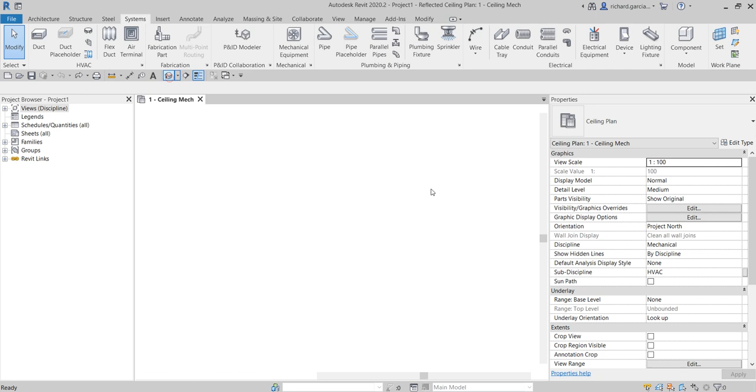So as you can see here, I have my sample model here. So this is on the reflected ceiling plan. So this is just a simple model, okay? It's just a box with some bunches of plumbing fixtures, but that is not what I need. So I'm just going to open the mechanical ceiling plan view here.

Okay, so what I'm going to do is I'm going to select the pipe here. So let's say, for example, for my piping, for my sprinkler design, or for my fire protection piping, what I want is to have a threaded pipe. Okay? So I'm going to show you how to create this kind of pipe here in Revit.

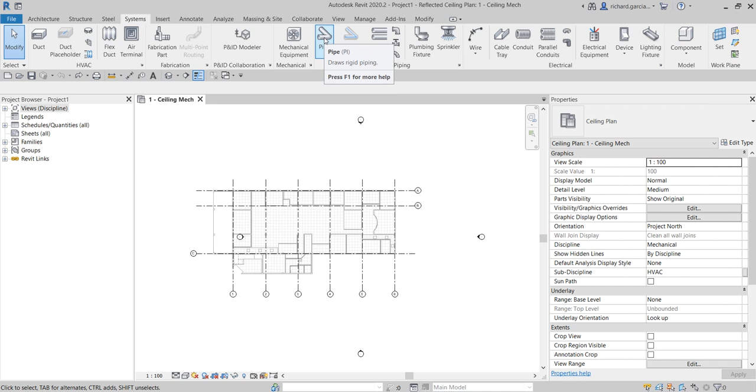Okay, so to start with, from the Systems tab, from the plumbing and piping, I'm going to select here the pipe. Okay, so I select the pipe, and then I want you to take note here on the properties. So as you can see, we have here the pipe types standard. So we have the standard type. Okay, so if I click the drop down arrow, you can see here that you have chilled water pipe, you also have PVC, DWV pipe, and then you have the standard pipe.

Okay, if I select the chilled water, as you will notice, the properties here will change. Like for example, here on the mechanical category or parameter here, we have the pipe segment. As you can see, the chilled water pipe segment is set to carbon steel schedule 40. Okay, and then there's the diameter 150.

So if I'm going to change this to PVC, let's check this out. So you will notice that it also changed here. So the pipe segment becomes polyvinyl chloride or PVC, and also the material here. So if I change this one to standard, as you can see, the default here is copper A.

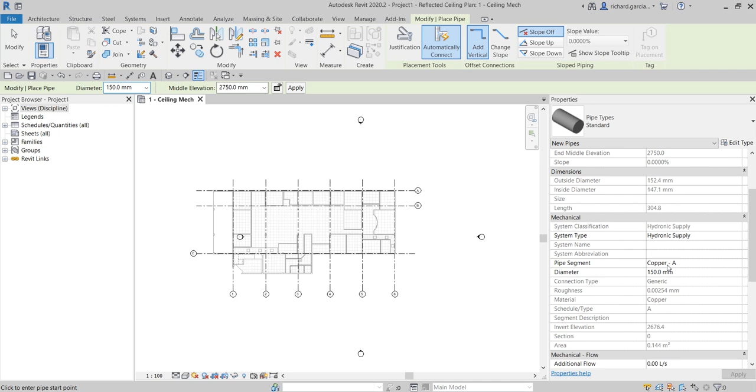Okay, so let's say for example, we are going to create a new pipe type just for us to start to talk about the routing preferences. Okay, so I'm going to create a new pipe type. So let's say I'm going to call this sprinkler pipe. Okay, so to do that, I'm going to select the type property here, edit type. So just click that one.

And then after that, the type here is standard. So I'm going to duplicate that one. And then let me call this sprinkler. Okay, oops. Okay, sprinkler.

Okay, and then I'll just select here OK. And also, let's say for example, I want my sprinkler pipe to be threaded pipe. Okay, because by default, since I copied this from the standard, I'm going to select OK first. I'm going to select OK, and then I'll start to create the pipe here.

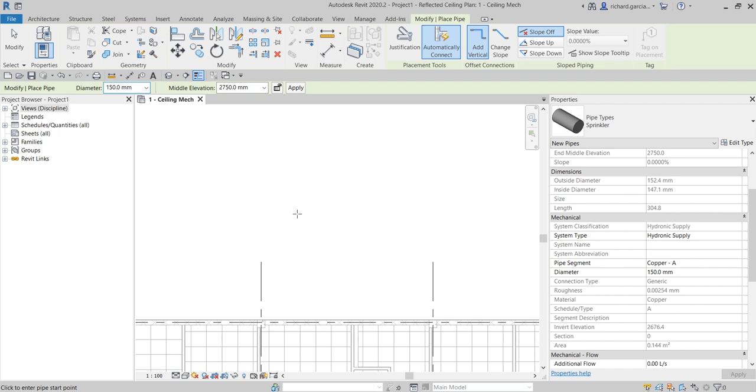So let's say just outside the building. So I'm going to pick here 1, I'm going to pick another point here 2, and then I'm going to pick another point here 3. Okay? And then after that, I select here modify. So if I go to the 3D view,

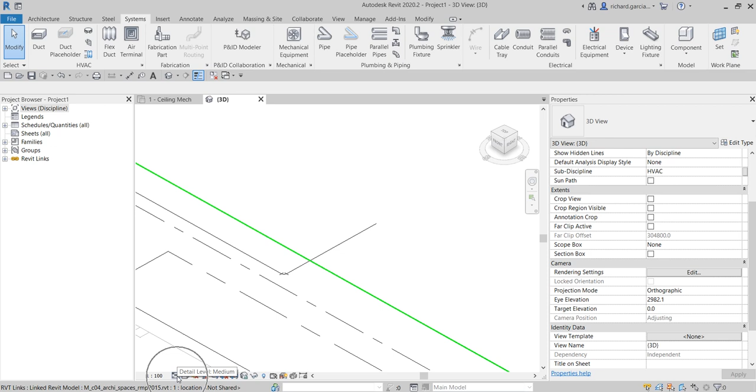as you can see, by the way, the reason why this one shows line, it's because of our detail level here. The detail level is medium, so I'm going to change that to fine so I can see how it looks like. And also, I'm going to change the visual style here to realistic. Okay, so this is how it looks like. So this is your standard pipe. As you can see, it's not threaded pipe, right?

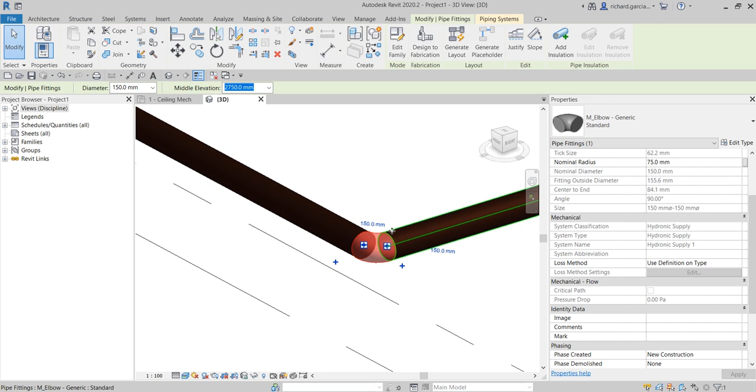So what I'm going to do is I'm going to edit my sprinkler pipe, which is this one. Because as you can see here, the pipe segment for that is copper A. So let's say, for example, for the sprinkler pipe, what I want is I want that to be carbon steel schedule 40. So how am I going to do that?

Okay, so I also want to set up the diameter that I'll be using for the sprinkler. So let's say, for example, I'm not going to use here 6, 8, or 10. I do not want that to be available on the diameter for my carbon steel. I also do not want to have 200. Just for example. Okay, so how are you going to do that?

So for you to be able to do that, you just need to go to the type property again. And then after that, this is what I'm talking about. So this is the routing preferences. It specifies the segments and fittings to use with specific size ranges when routing pipe or duct. So as you can see, routing preferences is also applied to ducting. So not only on piping, but also on ducting.

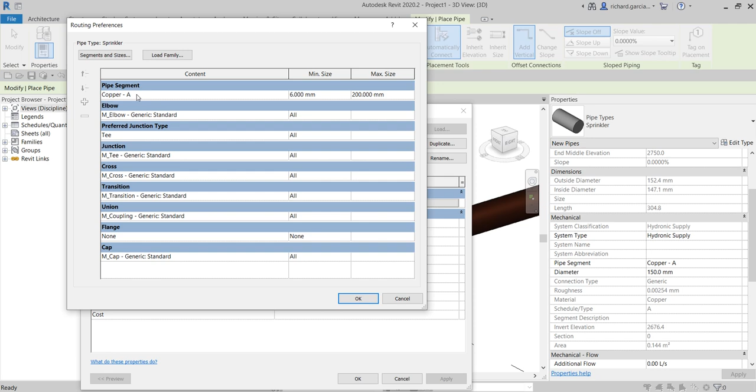All right, so what I'm going to do is I'm going to select here the edit. I click that one. And then as you can see, by default, the pipe material here is set to copper A, or the pipe segment. So I'm going to change this one. I click that and then click the drop down arrow here. And then I'm going to look for schedule 40 steel carbon. So I'm going to select that one.

And then like what I have said, for my carbon steel, I do not want to have the other values. So as you can see, the minimum size is already set to 15, and then the maximum size is already set to 200. So let's say I do not want to have 200. So I click the drop down. I'll change that to 150. All right. Okay, so each pipe segment contains different sizes of pipe here.

So as you can see a while ago, on the copper A, if I click this, copper A minimum size, it's not only 15, but it's 6 mm. But if I select here the carbon steel, schedule 40, the minimum size of carbon steel is 15. So if you are wondering how you are going to set up the minimum size and the maximum size, all you have to do is go to the mechanical settings, just like what I have shown to you last time.

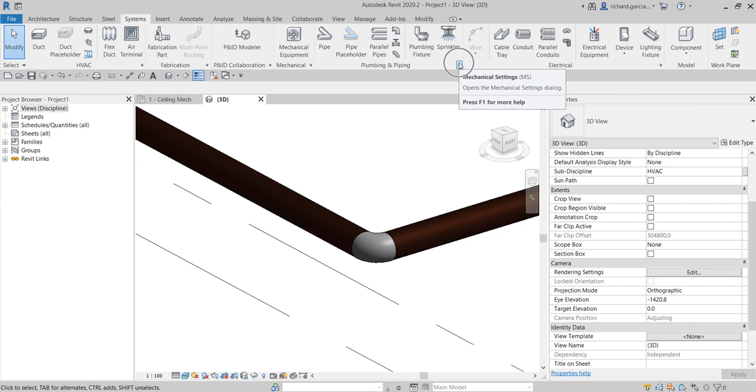Okay, so just a review, I'm going to cancel this one. I'm going to cancel this. Just a review. Your mechanical settings can be found here on the Systems tab. This one, Mechanical Settings, or you can also type MS. Click that, and then you go to the segments and sizes. This is what I'm talking about.

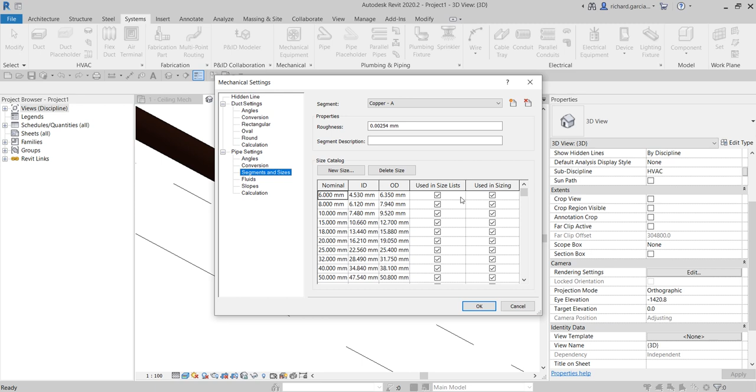You see our copper dash A here, the nominal size here is 6, and then the maximum size actually here is 200. That's the reason why. As you can see, it is used in size list and also it's used in sizing. So you have the ability here on the mechanical settings to control the sizes for a particular pipe segment. Like for example, for copper A, let's say, oh, I do not want to have 6, 8, and 10.

So all you have to do is to just uncheck 6, 8, and 10, just like that, and then I select here OK. So if I go again to the pipe here, and then I change this to, is it chilled water? So chilled water, oh no, it's PVC, no, oh, it's standard.

Okay, so for the standard, as you can see, the material here or pipe segment is copper A. If I click the drop down arrow here, there is no 6, 8, and 10, because we already control that on our mechanical settings. Okay, so basically that's how it goes. So you can work out your mechanical settings.

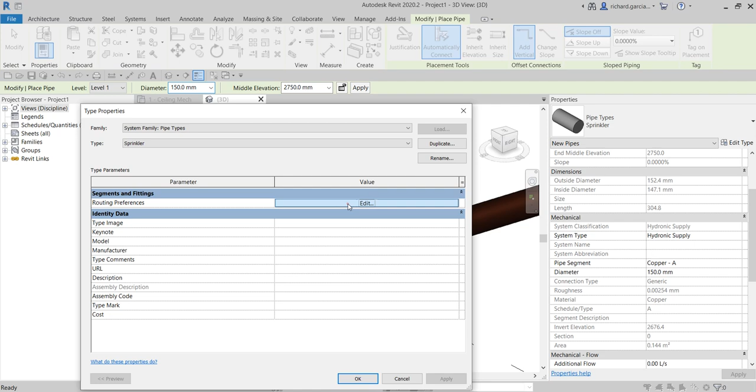Now, going back to our pipe here, for our sprinkler, I'm going to select edit type. What I want here, going to my routing preferences, I want to change this to carbon steel, schedule 40. And then this is the minimum size and maximum size. I'm not going to change that, so I'll just use 15 and 200.

Now, there are some instances wherein when you create your pipe, and then you suddenly bend to create an elbow, Revit doesn't allow you. Well, it's because there is no loaded family for the elbow, junction, cross, transition, union, flange, or cap. So that is happening when you use just a default template, like for example, architectural template. If I'm going to use that, I cancel this, cancel.

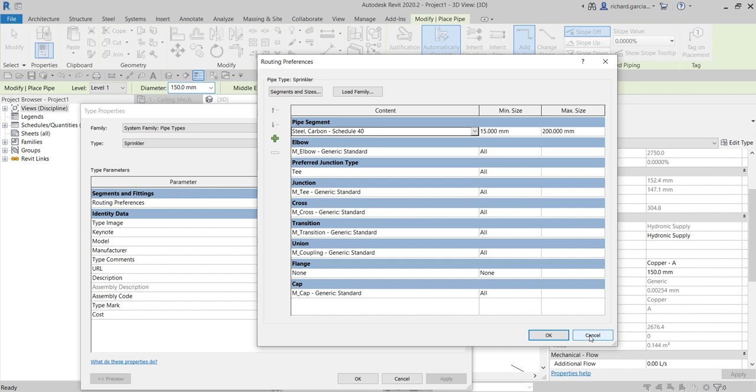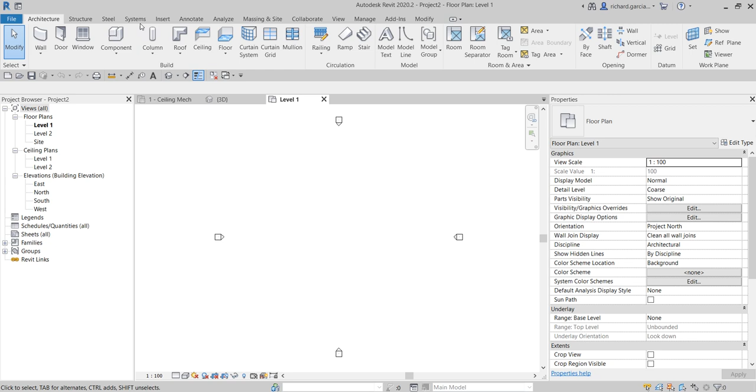So let's say I'll create a new template here. I'm going to use architectural template. Okay, I'll select OK. So let's check out if there are fittings that are loaded in this project. So I'm going to select the pipe tool, and then for the edit type, let's check here the routing preferences. As you can see, there are no loaded fittings here.

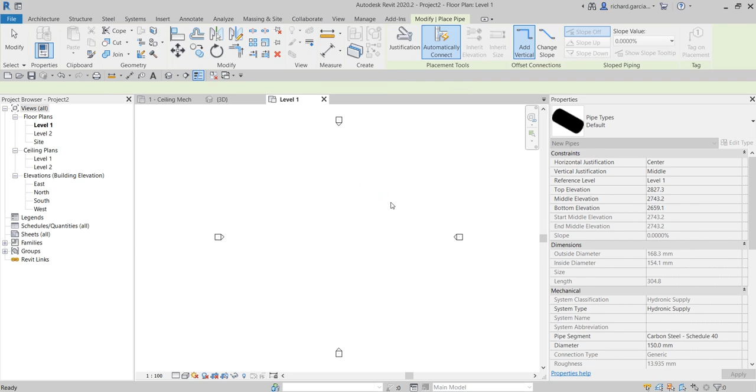You see, there's none. That's why some of the users, when they try to create a pipe here, okay, so I can't see the pipe here. It's probably turned off. So I go to the pipes. Okay, so let me just go to the 3D view because the templates here are not set up. So I go to the 3D view. So there's the pipe. So I'm going to pick one here.

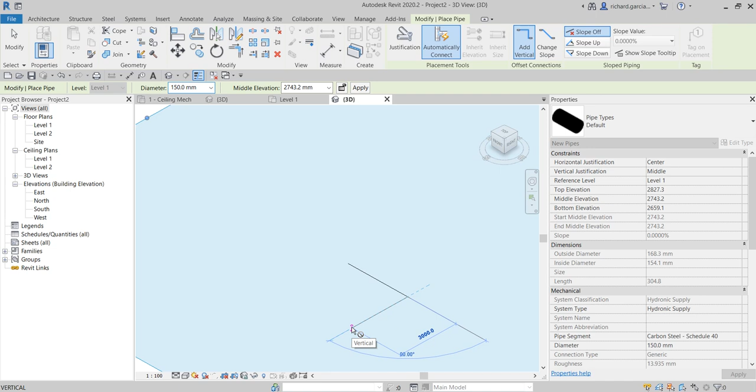You see, if I try to create another point here, Revit doesn't allow me. Okay, so the reason why Revit doesn't allow you is because there are no loaded fittings on your routing preference. The elbow fitting is empty. So like what I have shown a while ago, if I go to the edit type, I go to the edit on my routing preferences, you can see that the elbow here is empty.

So that is the reason why most of you, when you try to create a pipe, it doesn't create any elbow, or it doesn't create any tee. It's because there are no fittings loaded on the routing preferences. So take note of this, especially if you're just starting to use Revit. There are some instances you are using a different template, so you might encounter this one. Okay, so just a heads up.

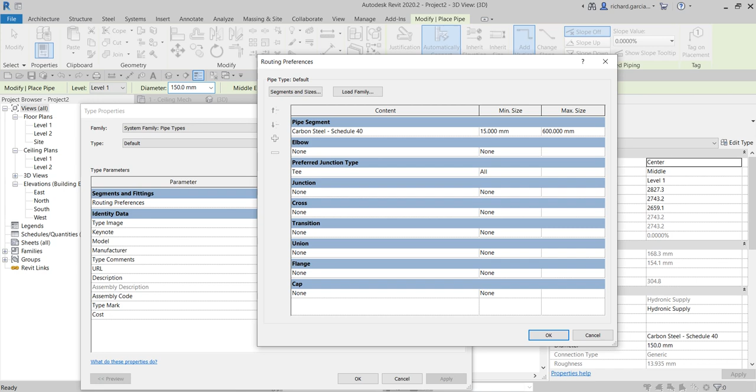So now going back to our project, I'll just close this one, close this one. Okay, this one. So here's our sprinkler pipe. So I'm going to change that. So I go to the edit type, and then I select edit. So like what I have said earlier, what I want is carbon steel, schedule 40, and then the elbow here. What I want is to have a threaded one.

But the problem here is there are no threaded fittings, right? So what are you going to do? Because currently if I click the drop down, there's no threaded, right? So how are we going to do that? Okay, so for you to be able to do that, you need to load a family. You need to load the family of the fittings for the threaded type.

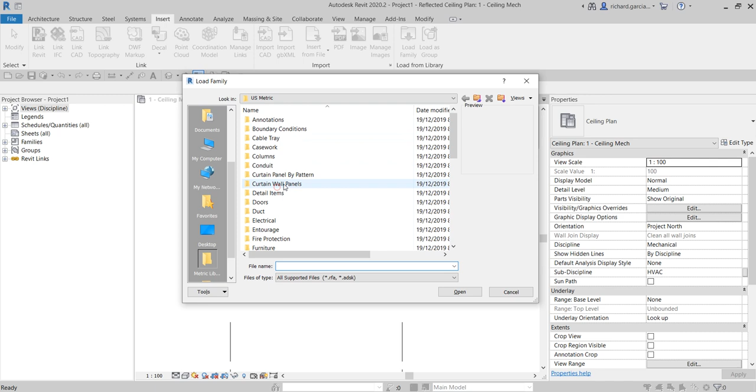Okay, so how to load that and where can you find that? To load your threaded fittings, all you have to do is to go to the Insert tab, and then you just need to go to Load Family, and then you look for, guess what?

Pipe. Okay, just double click the pipe, and then you go to Fittings, and then we are working on the, no, I think instead of carbon steel, I'll try MI iron. Oh, a malleable iron. MI. Okay, so I double click this one. I go to class 150, and then there's the threaded fittings that I want. So I just double click that.

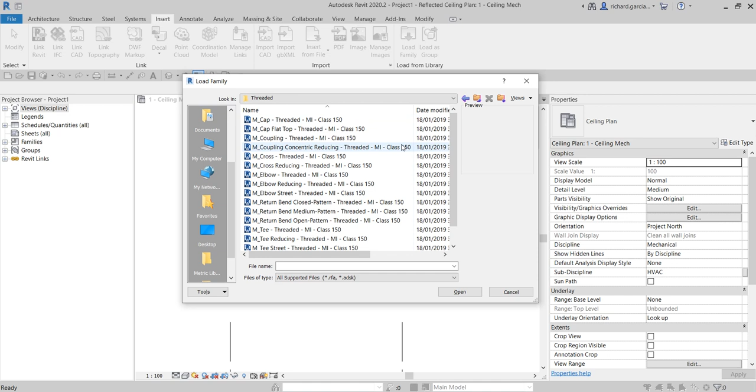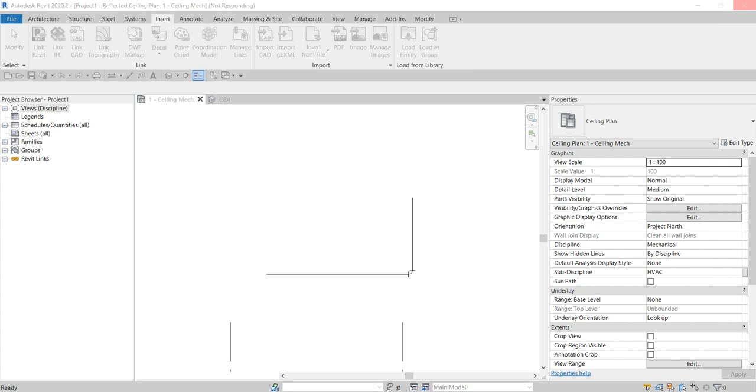There you go. So we now have here all the threaded fittings. Of course, you can select one by one here, but in my case, I'll just select all of this. So I click one, hold the shift, click the last one here, and then open. And then let us just wait for it until it loads completely into our model. Okay, let's just wait. Okay, so now it's done.

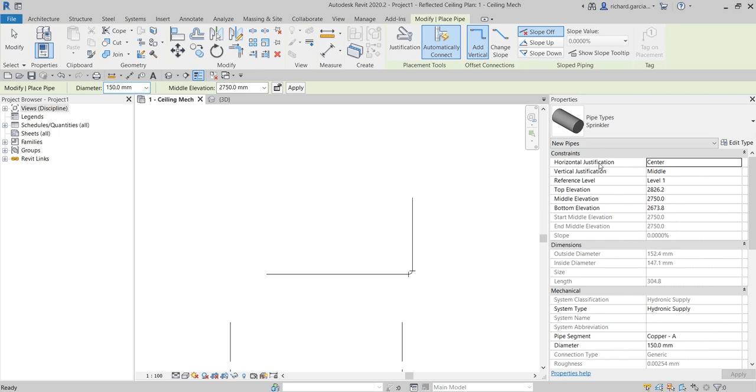The next thing that we are going to do is let's try that out. Okay, so I go to the systems, I select the pipe here, and then there's the sprinkler. I click the type here, edit type, routing preferences, instead of copper, I'll just use carbon steel for that. Steel carbon. And then the next thing that I'm going to do is I'll change the elbow here.

Take a look. If I click the drop down arrow, you will now see all the fittings that are loaded here. You see there's the threaded already. So I'm going to select the threaded. Okay, so the preferred junction type is Tee. And then for the junction here, I select threaded MI class 150. So you get the idea. That one.

Okay, what else? This one, coupling, concentric reducing threaded. So I'll select that one. Union, threaded. There's no flange for the threaded. Okay, for the cap, I select threaded as well. You can also specify here the minimum size of the fittings that you want and also the maximum size of the fittings that you want.

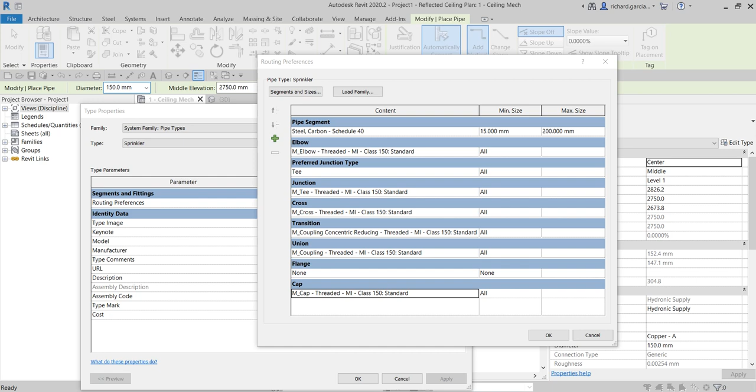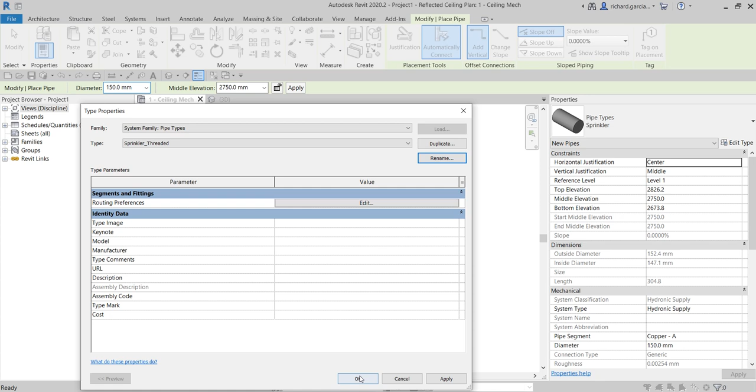All right, so right after you select the fittings of your pipe, the next thing that we are going to do is select OK. Select OK, and then probably I'll just rename this one. So I'll rename this sprinkler. That's a threaded type. Okay, sprinkler threaded. Right, so I just select OK, and then I'll select OK. And then let's go check out our pipe here.

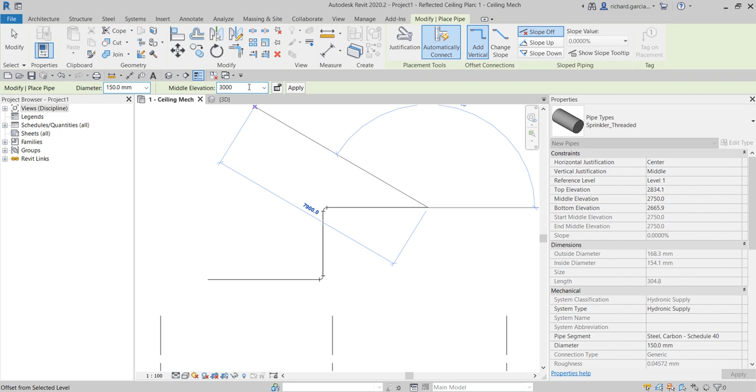So I'll just create one here. So I click here, and then I click another point here. Then I click another point, and then let's say I want to go up. So I'm going to change the elevation here. Let's say I'll type 3000. Then after that, I apply. There you go. Okay, and then I'll just select modify, and then let's go check out the 3D view of that one. 3D, let me just delete this one.

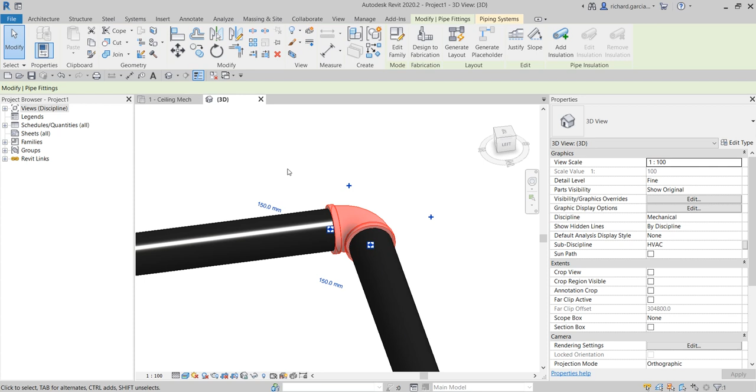And there you go. See? Okay, so basically it's now threaded. All the pipe that I'll be creating is threaded. So that's the representation of threaded piping in Revit. Okay, so don't forget that. You need to consider the routing preference of your model.

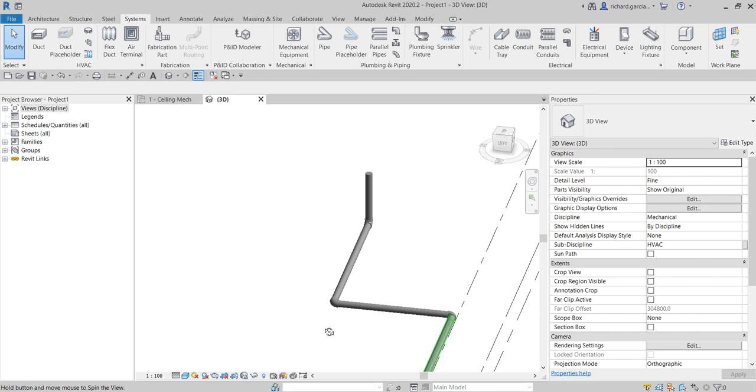Okay. Now, after learning our routing preferences and what it can do for you, the next thing that we are going to talk about is the system. Okay, so how are we going to configure the system of our project? Okay, so it's time to talk about system.

So if we know the physical type of pipe, just like what we did, we know that it's a threaded pipe, we know that it's carbon steel, and the specific fittings that we are going to use, the threaded one, we can direct our attention to what is actually in the pipe. So what liquid or fluid will run through that pipe? And also what color and line type we want to see them in, and then the material.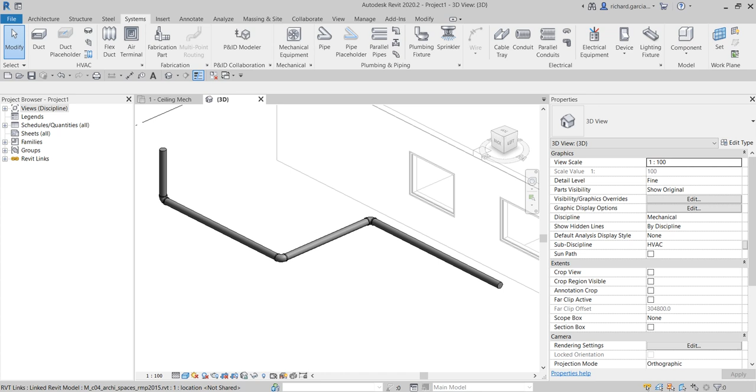So the next topic that we're going to talk about is configuring our system. Okay, configuring our system. So every time you create a pipe in Revit, as you will notice, if I select the pipe here, if I go to the properties here, notice that there's a system type here.

By default, as you can see, the default type here is hydronic supply. But if I click the drop down arrow here, you will notice that we have several system types here, including our fire protection. So we have dry, other, pre-action, or wet fire protection. And there are other fire protection systems that you can create here in Revit. So these are just the default fire protection, but if you want to create, you can do that.

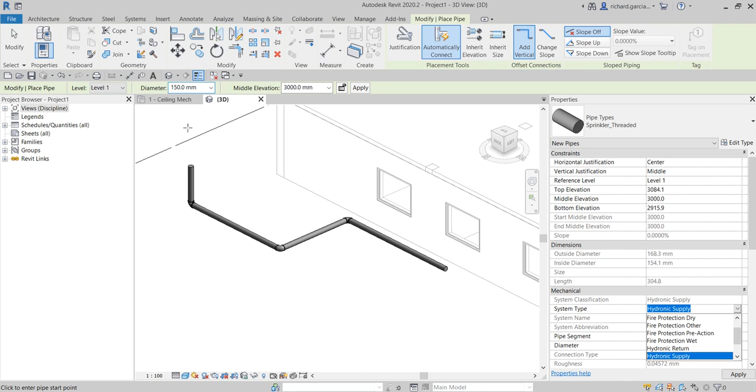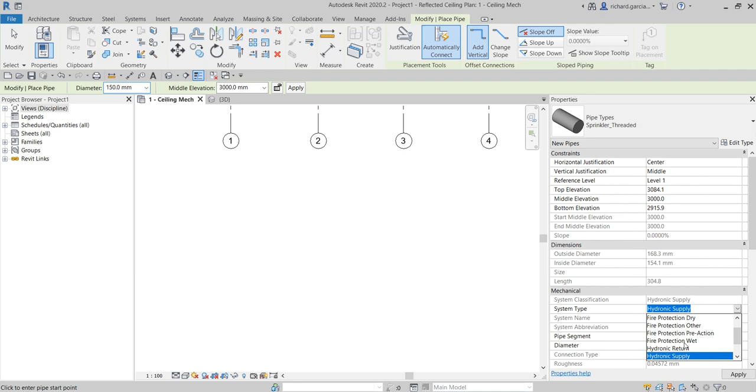So in Revit, it is very important to specify what system type of the pipe that you are creating. That's why every time you create your piping, so let me just do it here. So I select the pipe here. Before you do your piping, make sure you select the correct type here. For example, since you are doing fire protection, let's say I'm going to create a fire protection wet. So I select that one. There you go. So that is the system that we are going to create.

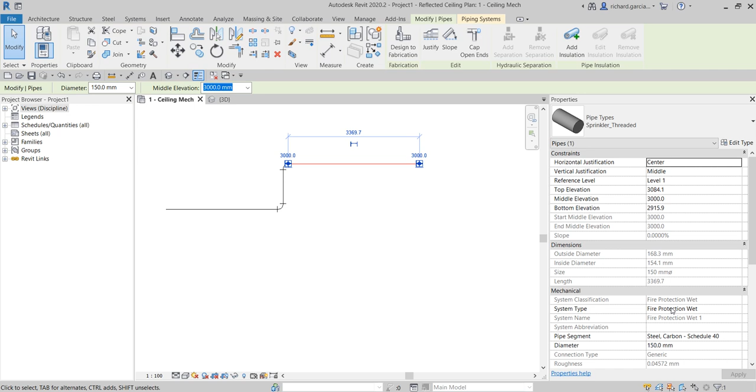I'm going to create now one here. Okay, so this is the type, the pipe. I'm going to pick another point here. I'm going to pick another point here. And there you go. I just select here, modify. So if I select this one, you will notice that the system type of that is fire protection wet. So that is the proper way of doing your piping.

Now, let's say, for example, you want to create another type of fire protection. For you to be able to do that, you need to go to Project Browser. And then after that, you go to the families here. And then you look for piping systems, you just expand that and then expand the piping system. As you can see, these are the different types of pipe system in Revit. So it's already created for you.

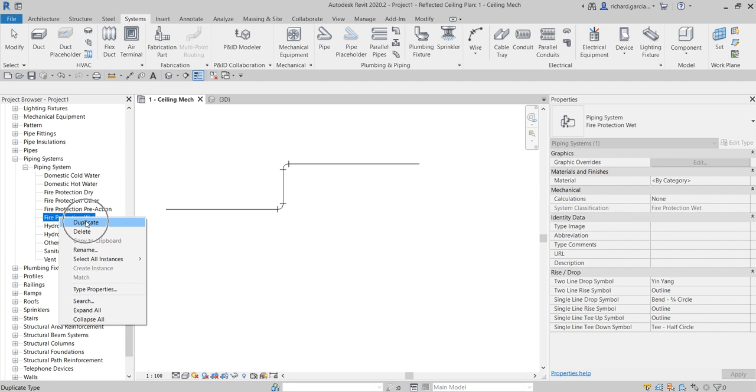Now, if you want to add another piping system, it's easy to do that. All you have to do is simply right click one of the piping systems here. For example, I want to create another fire protection wet, so I'm going to right click that one, and then there's an option here, duplicate. And then I can rename this one. Let's say I'll just type capital letters, wet, something like this. Enter.

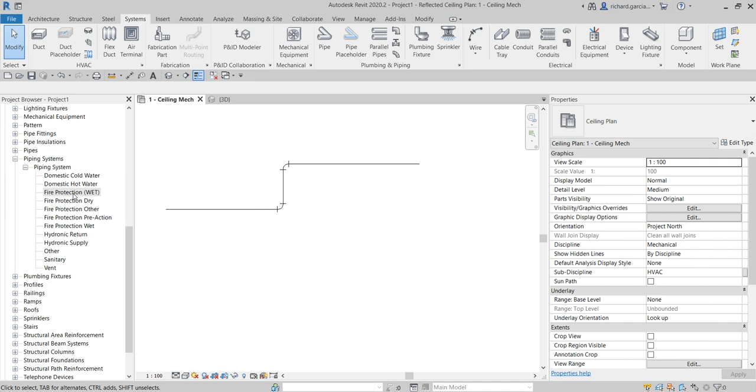And the next thing that I want to do is for my fire protection wet, I want this to be colored. Let's say I want this to be colored red. So I want the piping system fire protection wet, every pipe that I create, to become colored red. So how are you going to do that? To do that, you can right click this, and then you can go to the type properties. There you go. There's the type properties.

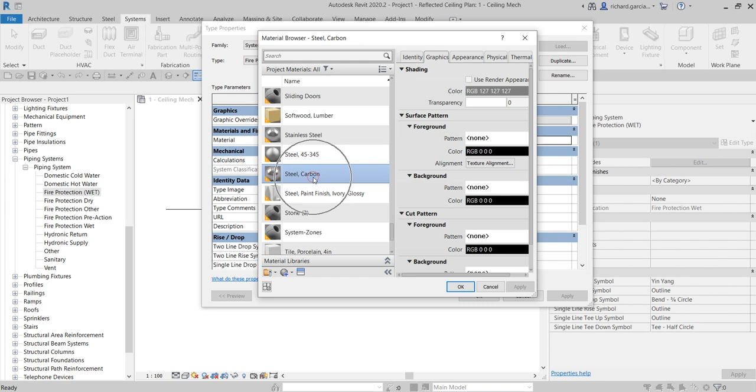And then again, you can also specify the materials here. You can click the ellipsis button, and then you just select the material. So for example, this is steel. Okay, so there's a steel. It's a carbon steel. So I'm going to select the carbon steel material, and then I'll select OK.

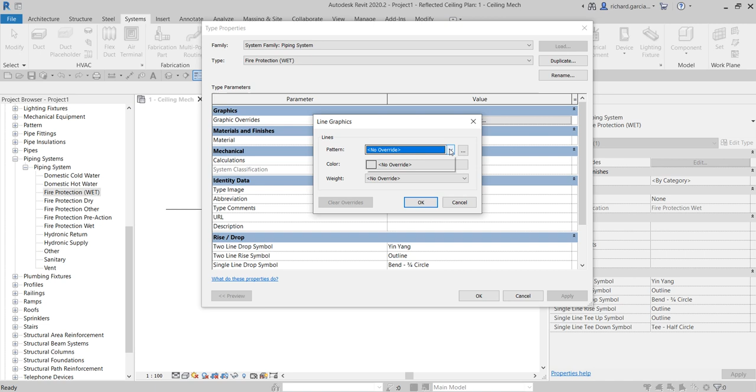And aside from that, there is this graphic overrides for the fire protection wet system. So I can select edit. I click that one, and then there's the pattern, line pattern. You can click the drop down arrow. So let's say, for my fire protection wet, what I want is center 1/4 inch pattern. So I select that one, and then I want to change the color here. So I click the color. Let's say I want that to be red, and then I select OK.

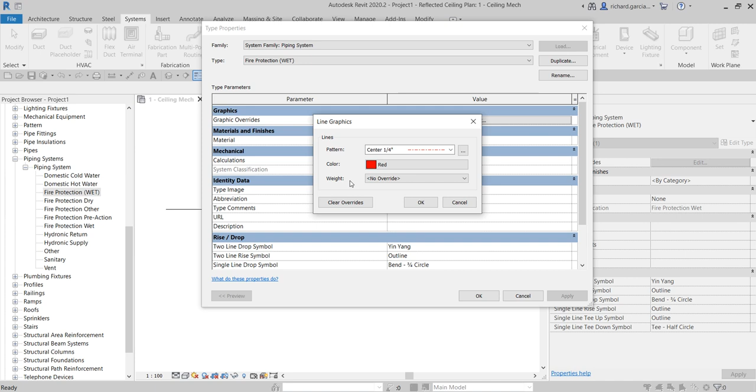And then for the line weight, I'll just use default, no override. So I'll just select OK. I'll leave it as it is for the calculation. You can specify the identity data here. You can put the type image, but you don't need to do that.

You can put an abbreviation here. Okay, so let's say this is wet. And then you can also specify your comment. You can put the URL. You can also put a description here, right?

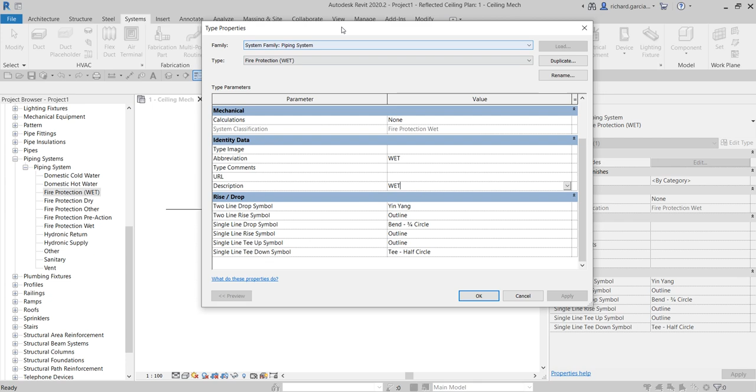Aside from that, you can also specify here the rise and drop symbol of your pipe, of your fire protection wet system. So for two line drop symbol, if it goes down, the symbol becomes yin yang. For two line rise symbol, it's an outline. If it's single line, like this one, if it drops, the symbol is bend three-fourth circle. If it rises, outline, etc.

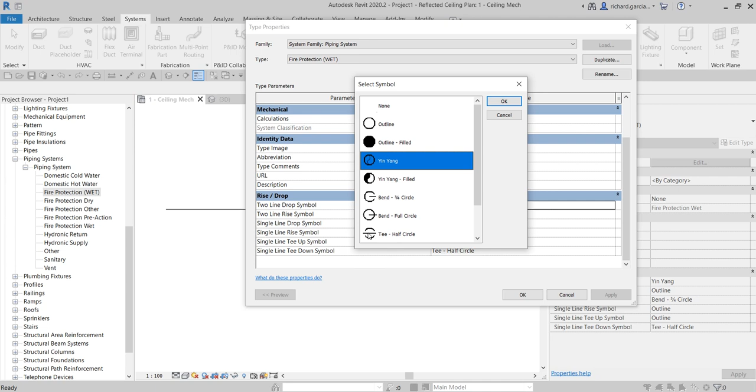Of course, you can change that if you want. You can click the ellipsis button and then specify the symbol. As you can see, there's a preview of the symbol you are going to select, so you can just select from here. I'm just showing you that you can override the settings of the system here. Let's say this is the one that I want, these are the settings, so I'm going to select OK.

Now, the next thing you're going to do after creating the piping system that you want - take note that you can also apply this to your plumbing system, to your sanitary system, to your mechanical system. You can add as many piping systems as you want.

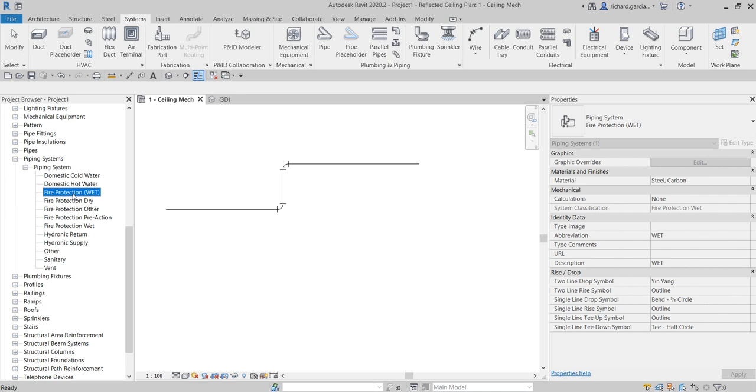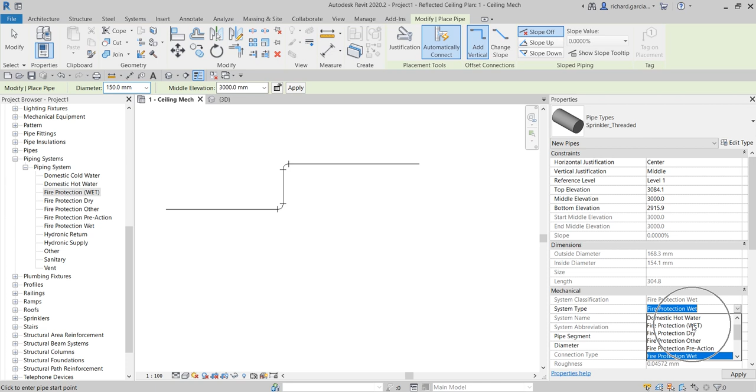Let's say I'm going to create now my fire protection wet system, so I'm going to select the pipe here. I still want my threaded pipe, so I'm going to make sure the system type I'll be using is the one I created. As you can see, it's now available here on the drop down arrow - fire protection, open and close parenthesis, wet. So I click that one, and then there's the pipe segment, the diameter, the elevation.

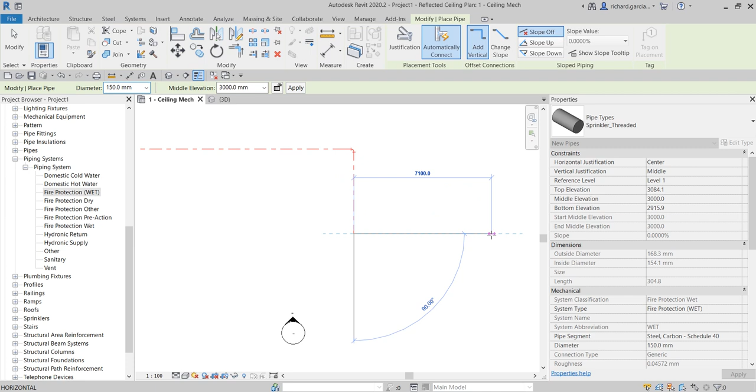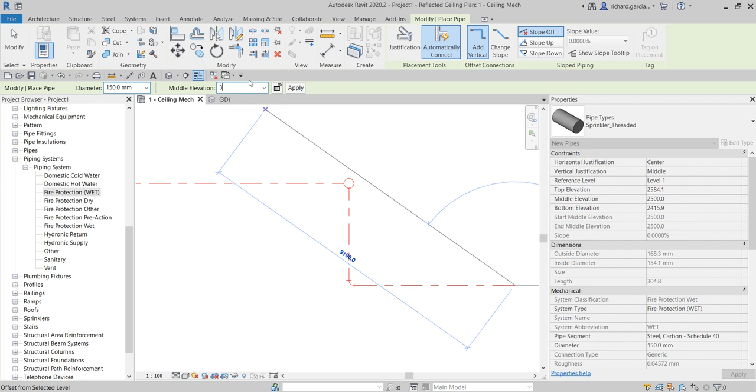Let's say I'm going to create here, click one point, click another point here, and another point here. I'm going down, let's say 2,500. Then I'm going to pick another point here. And then another point. Let's say, for example, it goes up, I'll change this to 3,000 again. And then I'm going to pick another point here, and another point here. And then I just select modify.

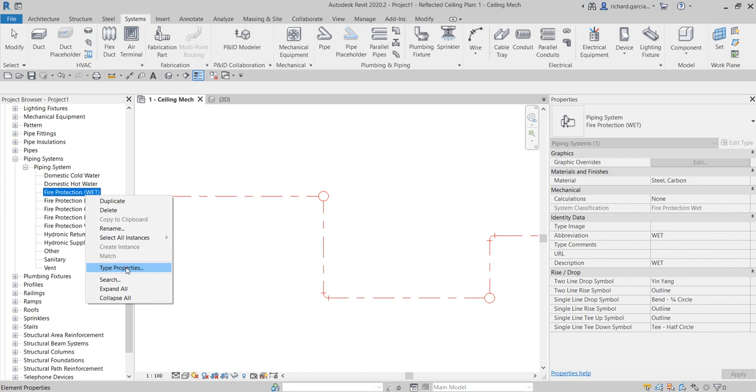As you can see, the line type here now reflects the settings we selected. The color is red, and also the symbol. If you remember, going back to the type properties of our fire protection wet, for a single line rise symbol, that's the outline symbol. So what does it look like? That's the outline.

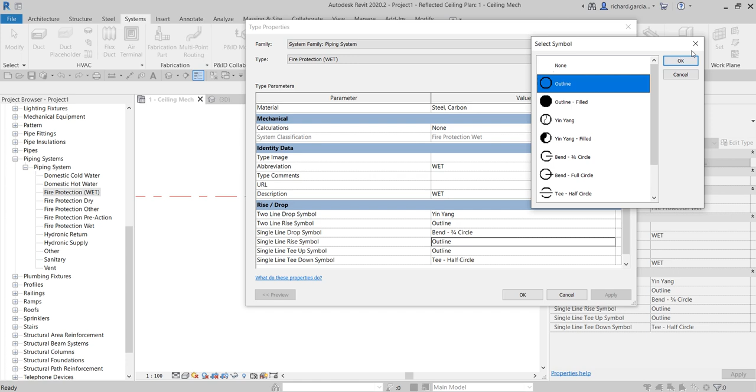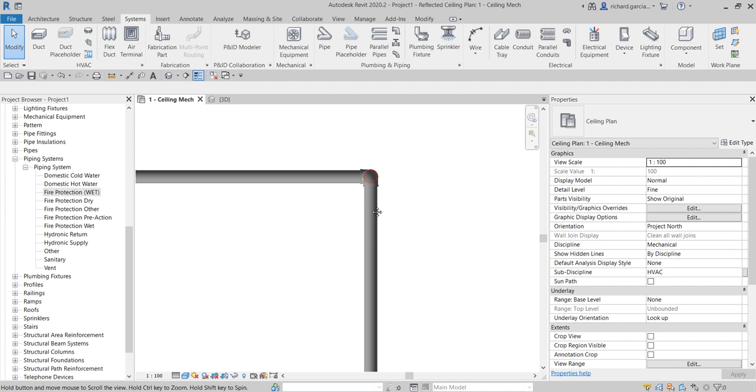So I'm now going to select here, okay. Now if I change this to fine detail level, you can now see here the symbol, right? See, how about we do a shaded view? So that's how it looks like, shaded view.

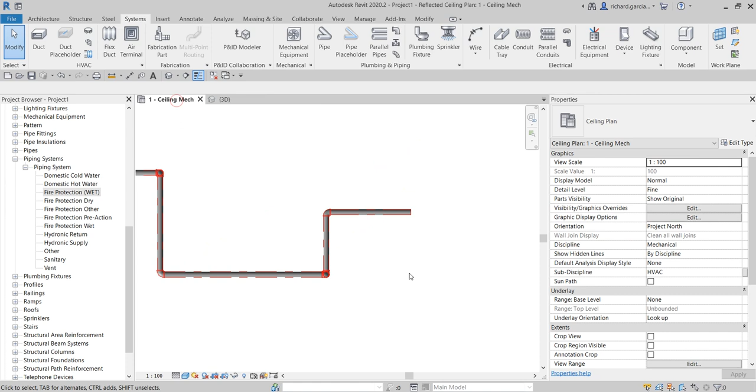Okay, see, it's pretty cool, right? If I go to the 3D view, this is the one, there you go. You see, there's the outline, it's colored red. So if we go back to the ceiling plan, this is how it looks like. I'll change it back to coarse, so this is now how it looks like.

All right, so basically, that's how your routing preferences and systems work. It's not that difficult. This is very important because before you do your piping, you need to set up your routing preferences, your pipe type, and also set up your piping system. Hopefully you learned something from this video.